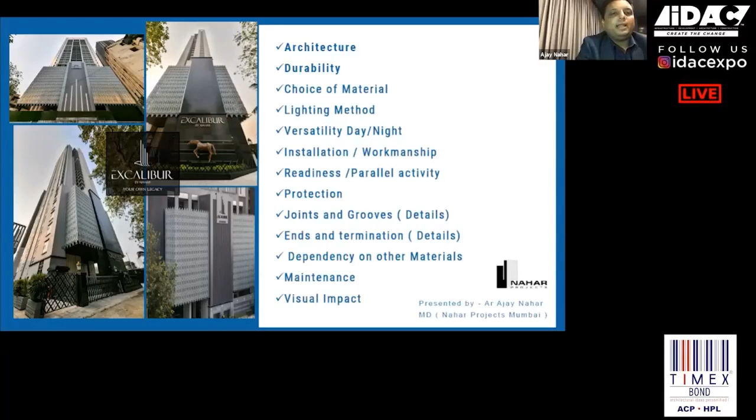And dependency on other material, of course, as I said, we've used aluminum composite panel and granite. While doing that, even those installers are separate. You may have the same or different installers, because granite might be given to one agency, GRC to a second agency, and aluminum composite panel to a third agency. So we need to see how the three of them work together and get this completed. Of course, maintenance and visual impact will come when all these things are taken care of.

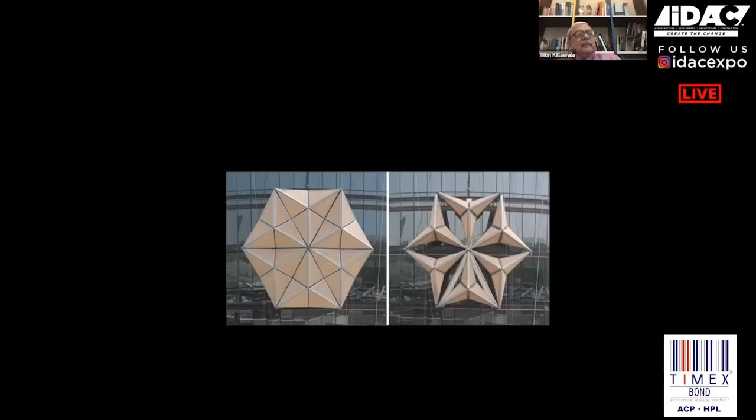This is Al Bahar Towers in Abu Dhabi, designed by Aedas Architects. Can you go next? It's based on the traditional Islamic shading device called Mashrabiya. This is a very typical Islamic form. So this is how it looks. And each and every panel is solar controlled, so as the sun travels during the day, the panel keeps on changing. And that creates a different drama, not only from outside, but even from inside.

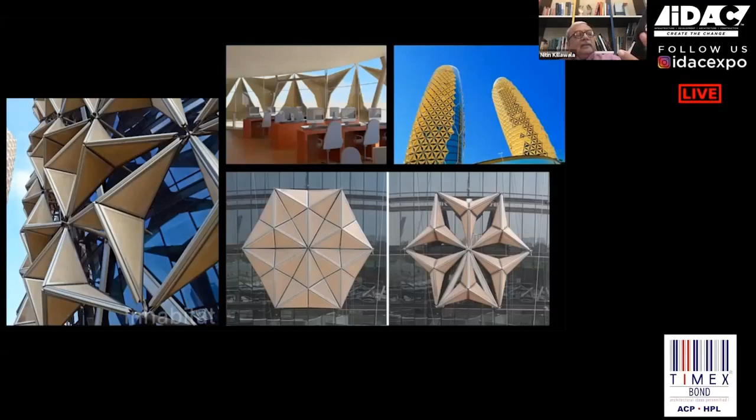Next, please. So this is how you see these panels from inside and from outside. The panels are actually triangular in basic profile, but created with fiberglass. It is also programmed to reduce solar gain and even solar glare, both. So this is very interesting, and this is possible even in a climate like this. They could control the energy, and it creates a totally different facade altogether.

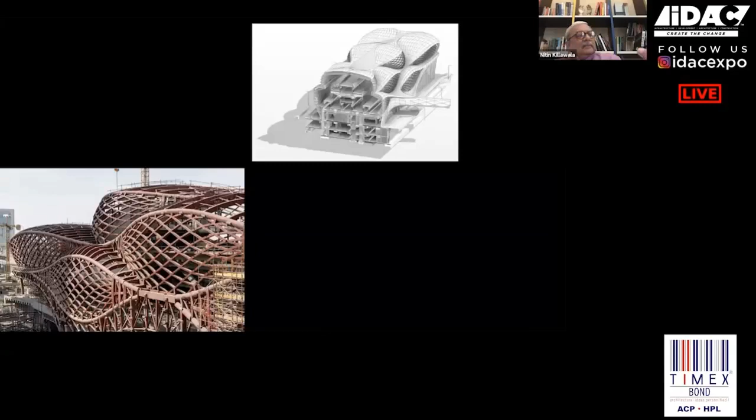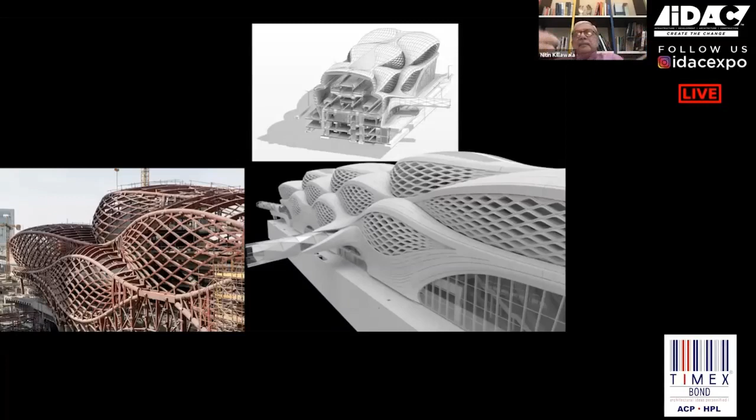Next, please. This is a station in King Abdullah Financial District, in Riyadh, and it's actually a metro station. You can see from this drawing, there are 6 levels. We are also seeing elevated metro stations coming up in our cities, so it's more of an analog. The entire scheme is totally independent of the main structure, and it is fixed only at ground level, and you get this kind of pattern. This pattern is inspired by sand dunes, as the architect says, and this is designed by Zaha Hadid.

There's one detail. Just go next. So the entire facade is a composition of UHPC, that is ultra high performance concrete. It offers new capabilities for structural purposes as well as for aesthetic purposes. This is from outside. From inside, it is all GRG, glass reinforced gypsum, which is also very well utilized. Next.

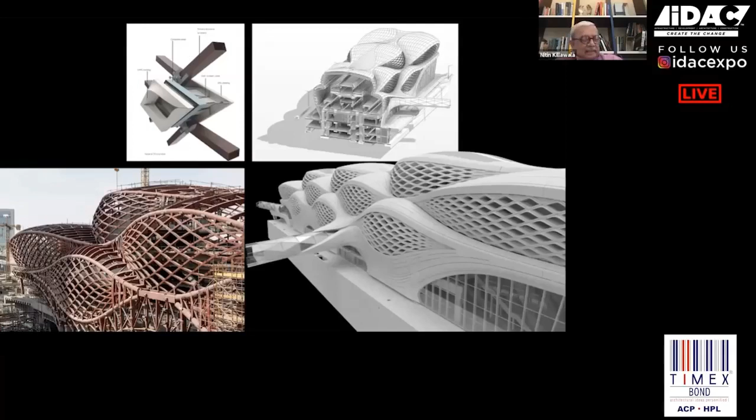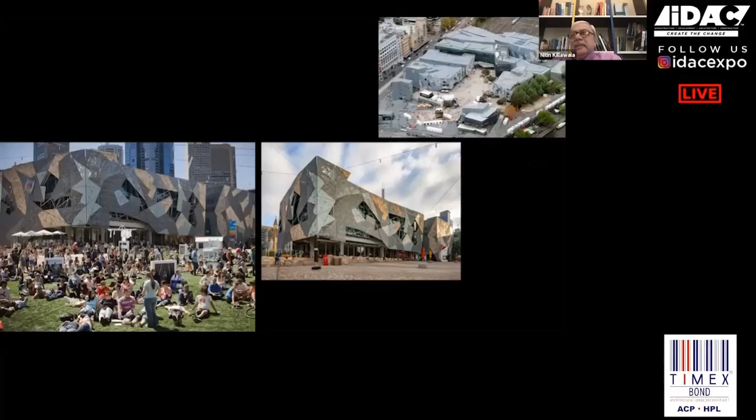Now this is more of a public space in Melbourne called Federation Square. Next, please. So you can see from the top, it's all like badminton court kind of buildings, all dead walls. But how can you make these buildings more interesting at the street level? So it totally changes the entire dead walls of this complex, and then you can really play with light, you can play with colors, you can play with forms, and so on and so forth.

And this kind of facade also gives the opportunity for integrating various services which perhaps many times may be used from outside. So this is Federation Square at Melbourne, designed by Lab Architecture Studio in Australia. Next, please.

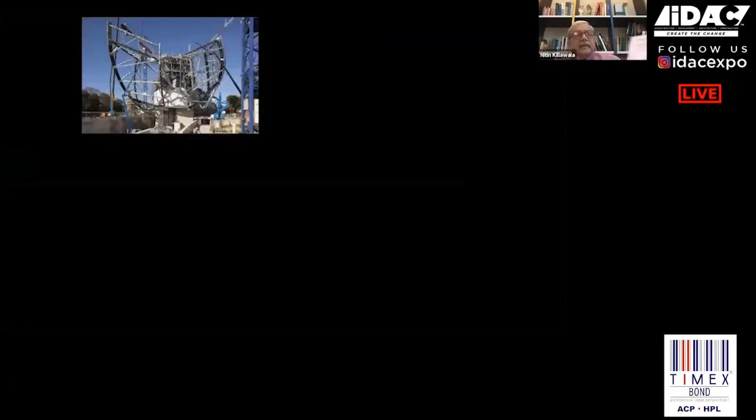Now, this is one of Frank Gehry's famous works. It's the Louis Vuitton Foundation in Paris. You can see the slide on the left corner. When it is constructed, these are the forms. But when you look at the section, it is like any other normal building. It has got a basement and 3 or 4 floors above that. But how you envelop the entire building has created a huge drama.

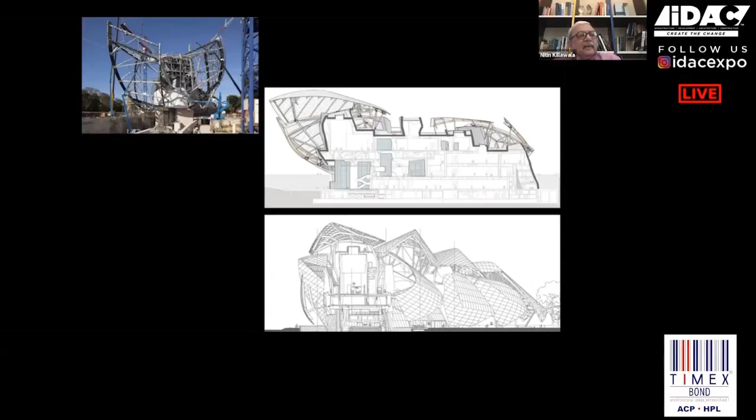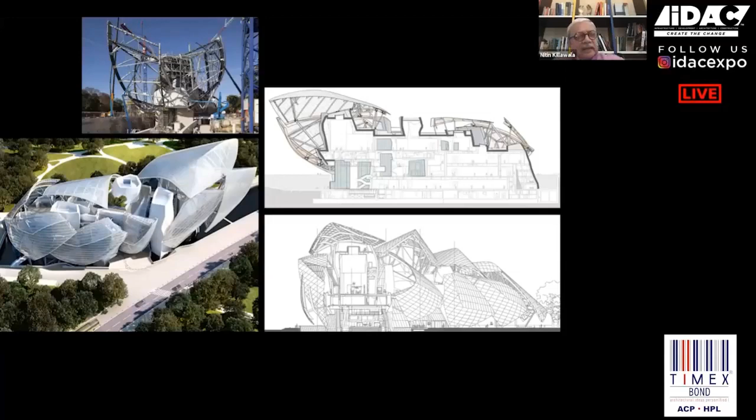Here they used something like 19,000 Ductal panels. Just go to the next slide, please. So you deliberately distort the form of the building, and it's like a sculpture. Like I showed you a book which is very functionally mounted, but when you have a jacket, a book cover, it totally changes the perception of that book. It is somewhat on that line. Next.

This is in Masdar City, near Abu Dhabi, designed by Norman Foster, where the entire city is supposed to be sustainable. And we need not always use glass or aluminum or GRC or that kind of material, but here they have played with clay, which is again locally sourced. And these are typical, again, Islamic patterns having jalis and shading devices.

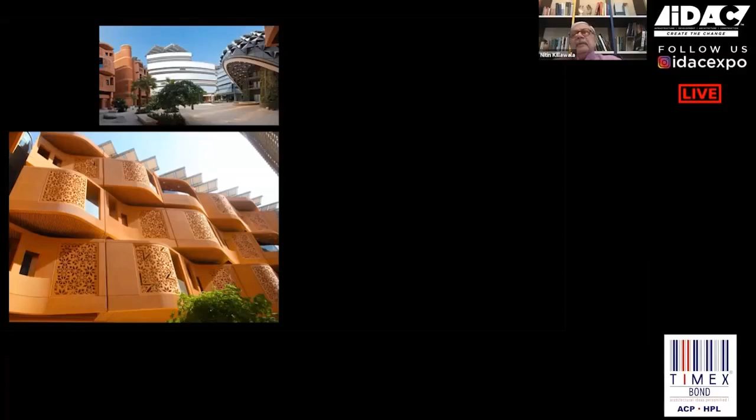Next, please. This is some detail of that. So they are all cladding. If you see the plan of the building, it is absolutely a straight line, and this is nothing but a dormitory. This is one of the dormitories in that campus, and it gives a totally different form. You don't normally see dormitory buildings so interestingly composed. And it goes with other buildings. There are so many buildings in the campus, but this really stands out. Next.

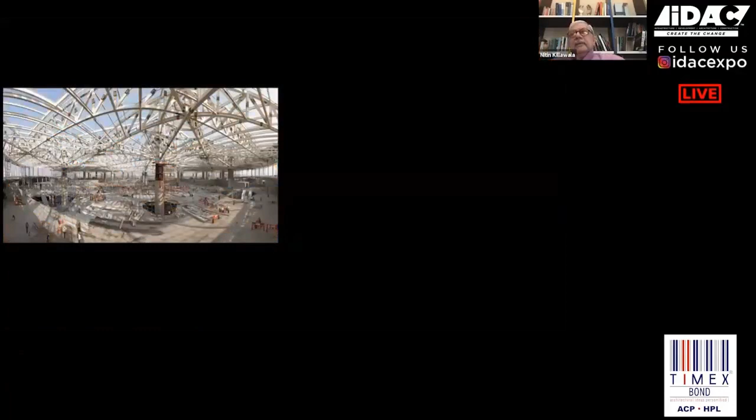Now, this is our own T2 terminal at Bombay Airport. So if you look at the structural system, these columns are maybe 60 feet, 80 feet apart, and there is a roof. But this is totally transformed by cladding of materials. Next, please. And everyone has seen this. Of course, we've never seen it in this form, but the finished product, where they combine the skylights, they combine all the services, they've protected the basic steel structure, and it gives a totally different form. So this is possible only with this kind of cladding materials and creative use of that.

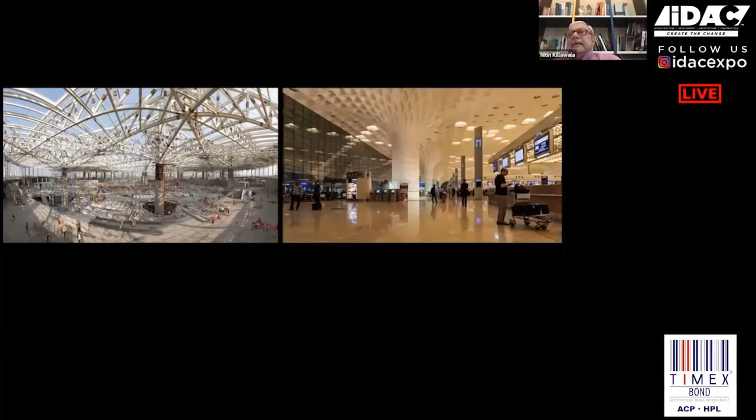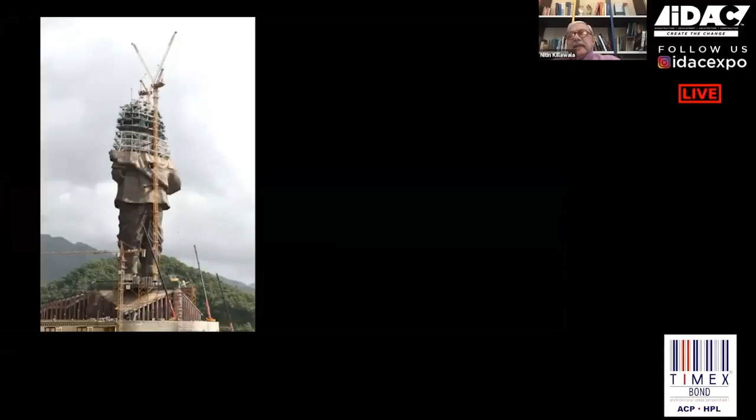Can you go to the next, please? Yeah. So this is what we see every day. And the lighting, skylights, and the harshness of the steel structure. And of course, it protects the columns which are cladded. Next. This is the last set of slides. Again, Statue of Unity. It's all steel structure inside, but it is only the cladding material. These are all bronze plates. Next, please.

So this is a good representative picture that there is a lift shaft in the middle and how the structure is made. But with cladding, like Frank Gehry uses in his own way, Zaha Hadid may be using it some other way. This kind of opportunity is also possible in these cladding materials. So this is just to start off, what is the potential and how we are going to see our buildings in a totally different dimension. Rest we'll discuss as we progress. Thank you.

Thank you, sir. We had a very wonderful presentation of different facades across the world, with the different techniques being used to camouflage the structure inside. So the structure remained that of a building, but the facades we saw in this presentation gave us different views with different materials. Thank you for a wonderful presentation, sir.

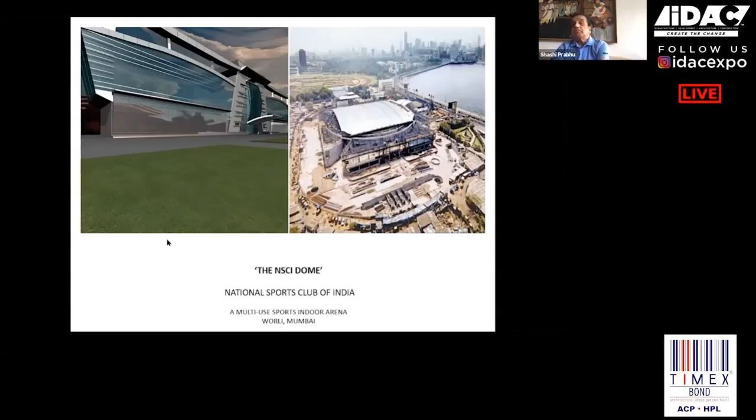This is the front elevation, this inclined column, and the Sardar Vallabhbhai Patel stadium is just in front of that. Look at it, this is quite impressive, glass. You can see the upper side, which is the circular area. This glass is so difficult in construction, because it is not only taking a curve in the elevation, but in the vertical side also it has a bend. So imagine each glass piece has a different curve, which I have to manage.

At the end of the day, it should look neat, clean, and at the same time it's facing the seaside. The water should not trickle in. So a very tough job, but it was done successfully. I'm really proud of the contractor who did this. So this is one of the structures I'm always proud of, and it is really hosting so many programs, including the recovery of patients in today's COVID situation.

This is one of my projects that I always show people, and we are creating similar types of structures. People started demanding that you try to do something, but we have to do the evaluation, the sustainability while spending the money, how you are going to recover it and use it. This is what I always tell my boys as architects: think twice how you are going to maintain it, how you are going to service it, and how you are going to use it. Next.

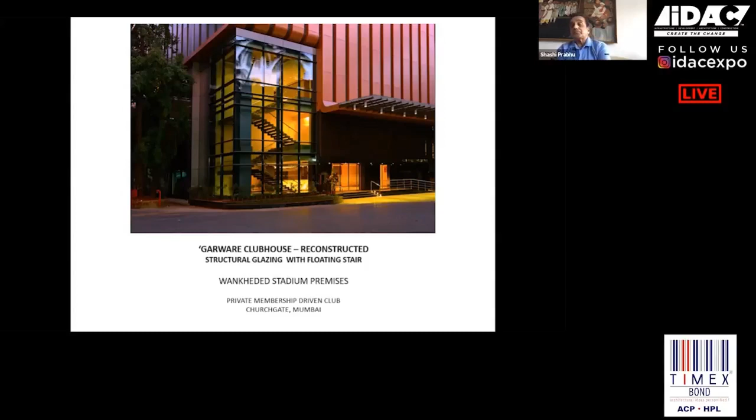Oh, this is another structure at Churchgate, because see, people must be going. Those who are also with me here, they may be members here. This is typically designed on a British type of era, where people should feel that this is basically a cricket ground, and it's the main pavilion, which has everything there, including bar, sit-out area, restaurants, health club, you name it, whatever is required by the club has been provided.

And then Vijay Shirke, they did the construction work, and we were the architect, and then we meticulously worked. There is a car park of 300 car parking. Oh, I forgot to say about NSCI Dome. There we have about 800 car parks. Car parking is a basic issue, and then we have to address that for the public building.

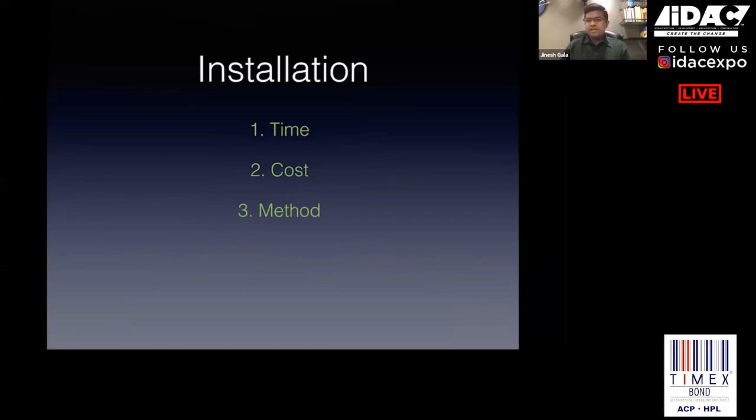When I talk about time, it's how fast that product can be installed whenever the facade work is going on. If we take an approximate size of 1.2 meter width by 2 meter height panel, ACP and HPL can be installed at 60 panels per day, and glass can be installed at about 50 panels per day. These three are the widely used products in India right now.

So whenever I speak with my research team about developing new products and what's coming new in the facade industry of India, I always prefer products that can be installed fast. Because as we know, the faster the work is done, the faster the promoter or the builder can hand over the project to its customers, and it's beneficial for them as well.

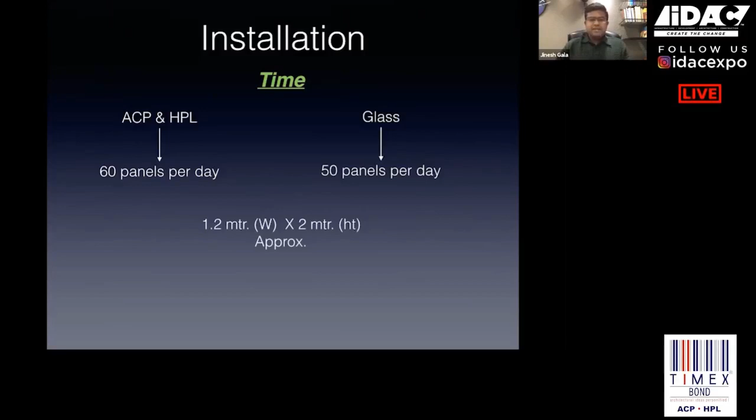Second is cost. Here I've tried to portray a cost comparison of the installation cost. As you can see, there are various facade products that I've mentioned. There are product costs also of the same, and the installation cost. Like I mentioned, time is important. Cost is also very important, as we all know. And some products like ACP, HPL, exterior tiles, they cost a reasonable price and give a very aesthetic look.

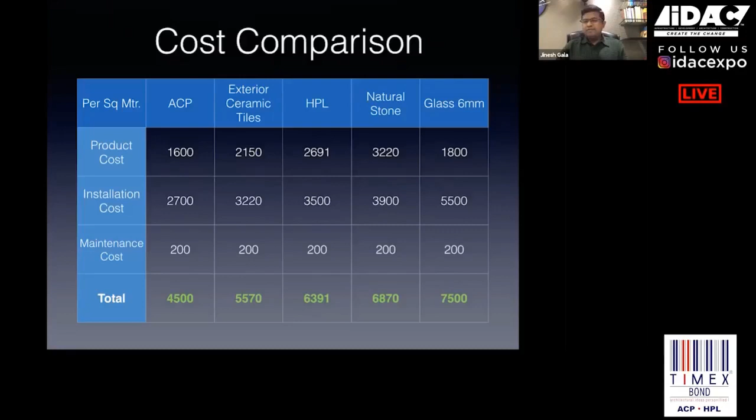And again, our R&D department always works on getting new products, new designs. So again, we always keep the cost of the product in mind, where we want the masses to use our products.

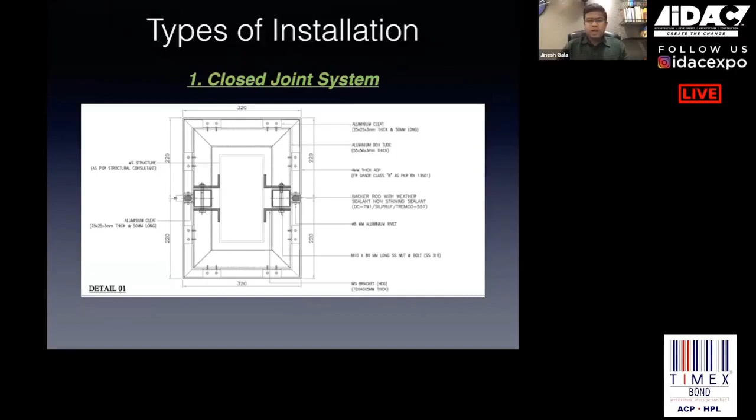After that is types of installation, basically the method or the way we install. Here there are basically two major systems that are used widely in India. First is closed joint system. This is a very known method for everyone, and basically we first make a tray, fix ACP with rivets and fill silicone in the gaps. And I believe this is the most widely used installation system right now.

Second is open joint system. In the open joint system, the major difference is that there is no silicone in this type of installation. We don't use silicone, and the panels are hooked on SS pins. These designs that I've just shown are in terms of installing ACP.

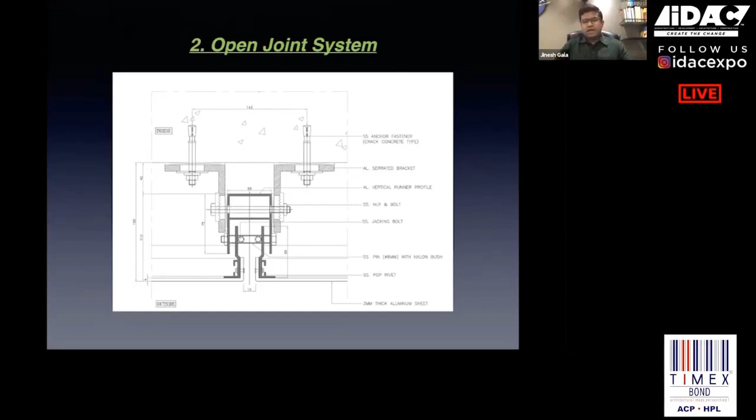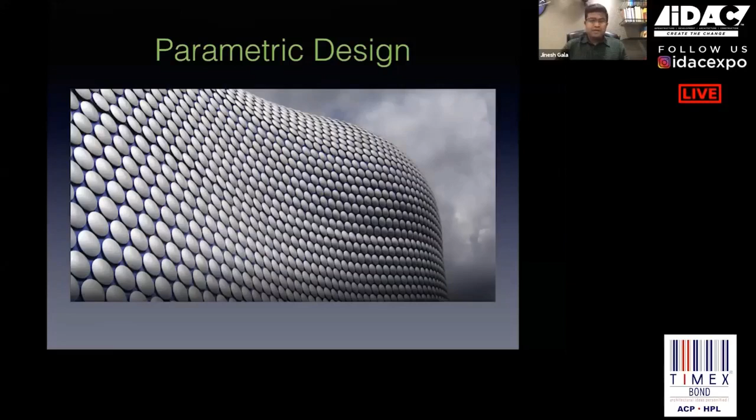Now, talking about parametric designs, this has been in the talks recently. Parametric design is basically a paradigm in design where the relationship between the elements, product elements, is used to make and inform the design of complex geometries and structures. So again, I would like the facade products to be flexible enough that we can give them different kinds of shapes to attain such complex designs. And I'm glad that products like ACP and HPL can be fabricated in shapes and designs like these.

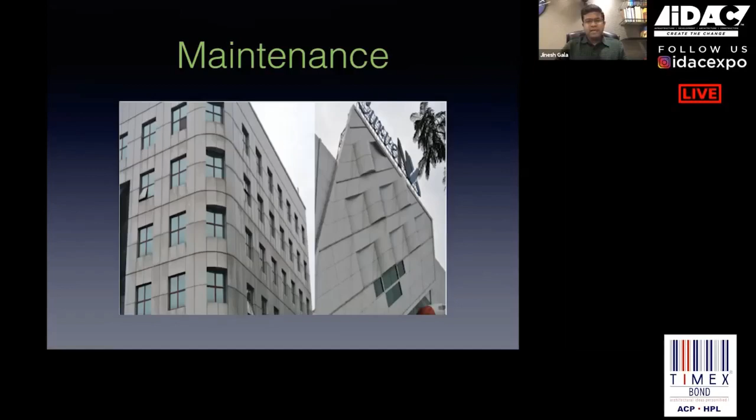Now, to show how important maintenance is, I would like to discuss a case study of the world's tallest building, that is Burj Khalifa in Dubai. As we all know, it is 830 meters high and has 24,830 windows, which is a very high number. And a fun fact is that when this building is cleaned, it requires a team of 36 people and needs 3 months to wash all the windows. That is around 17,000 hours of work, which is huge.

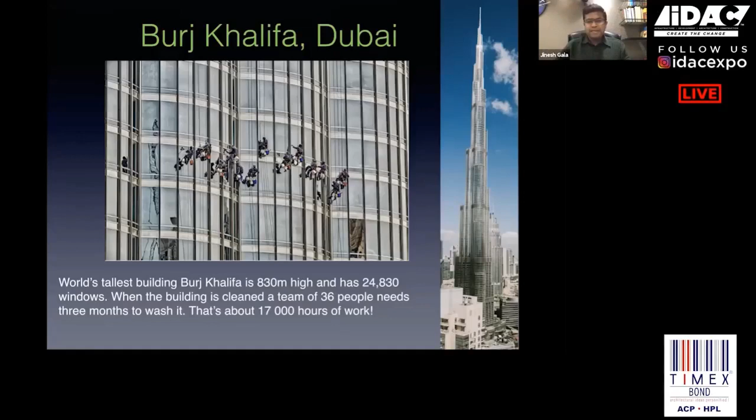And one funny part is that once they start from top to bottom, it takes 3 months. And once they've finished the job, they again start from the top, because the top windows have to be maintained again. And such is the case with all the tallest buildings and iconic buildings in the world, that maintenance of these buildings is a very big and crucial part. And I would want the same thing to happen in our country, that most buildings should be maintained to maintain their facade value, and to make sure they look fresh and nice.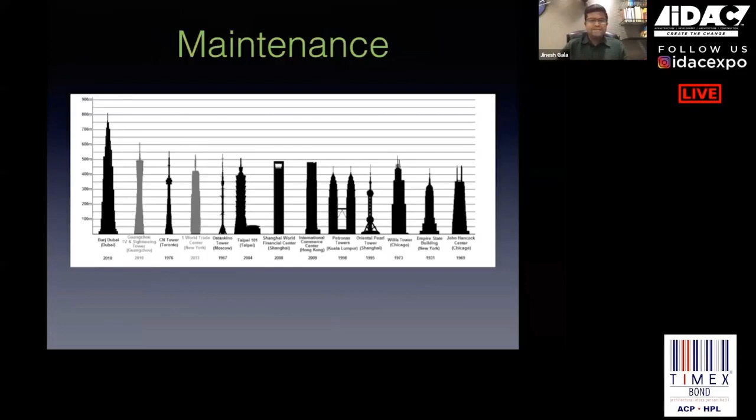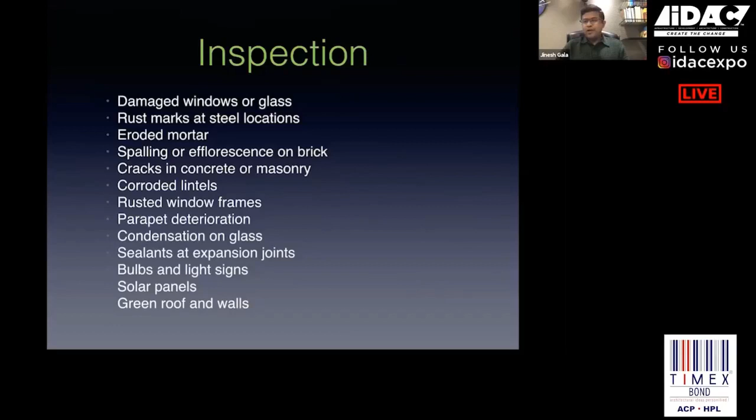And I'm seeing the change. I'm seeing that in major cities, all the A-grade cities like Mumbai, all the good buildings are being maintained, and every big tower or good building has proper systems where all the recent maintenance techniques are used. So I'm really happy to see that, because being in the facade industry, I would always want our buildings to shine and look good. So yes, this is it from my side. Thank you.

Can I start with Nitin sir first? Yeah, sure. Sir, when you're designing a facade in the earlier stages, what factors are considered in view of the maintainability of the facades? See, to me, maintenance has a lot to do with workmanship also. You may have a fantastic product, but if it is not executed properly, and that again goes back to the detailing and appropriateness of the material, etc.

So it's not just for any one aspect of building design. Maintenance is very important, and we have been talking about this for ages; whenever a client comes, they always say it should be easy to maintain. So in one line, that covers everything. Coming back to facades specifically, it is the appropriateness of the material which is used. But the facade gives a totally different dimension to the building, and that is very important, and it's a recent trend, maybe during the last decade.

So how we take it forward in terms of not only aesthetics or maintenance, but the overall form of the building, how you perceive the building, how you would like to give certain importance or certain details. So maintenance is something which is inherent to me. Even a simple plastered wall, if the plaster is done properly, works; at the same time, if you use a very expensive material and something goes wrong in the joinery, then the entire purpose is defeated.